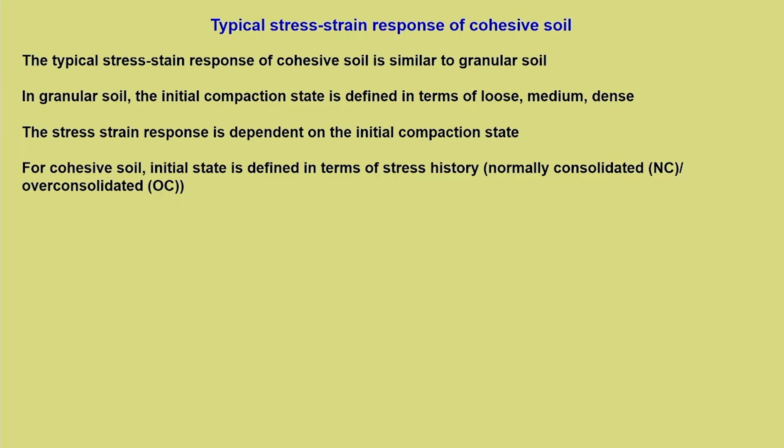The typical stress strain response of cohesive soil is similar to granular soil, which means the end response remains same. In granular soil, the initial compaction state is defined in terms of loose, medium and dense. The stress strain response is dependent on the initial compaction state. For cohesive soil, the initial state is defined in terms of stress history, normally consolidated or over consolidated. Now possibly you will appreciate why we discussed the volume change characteristics of the soil. It is basically for this; the stress history dictates the kind of stress strain response of cohesive soil.

The stress strain response of NC is similar to loose state. The stress strain response of OC is similar to dense state. The stress strain response is in terms of deviator stress and axial strain, because we are referring basically to triaxial tests. In general, shear strength of cohesive soil is tau f = c' + sigma'f tan phi'. This is a general expression. Now when will c' be there, and when is it not there? That is a typical thing which we need to see.

Now let us not go by the judgment that a cohesive soil always has cohesion. This is not correct. As we progress in this particular module, we will see that it is not so. Under what circumstance we have cohesion, we will see later, but in general we can consider the Coulomb's model tau = c' + sigma' tan phi', and this is for effective stress, a long term condition.

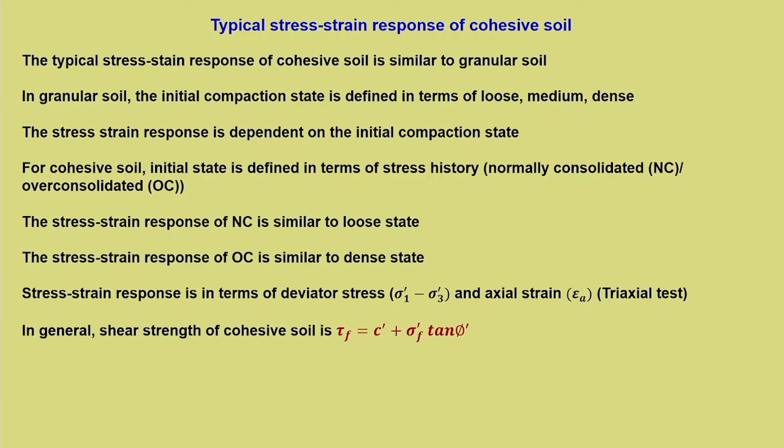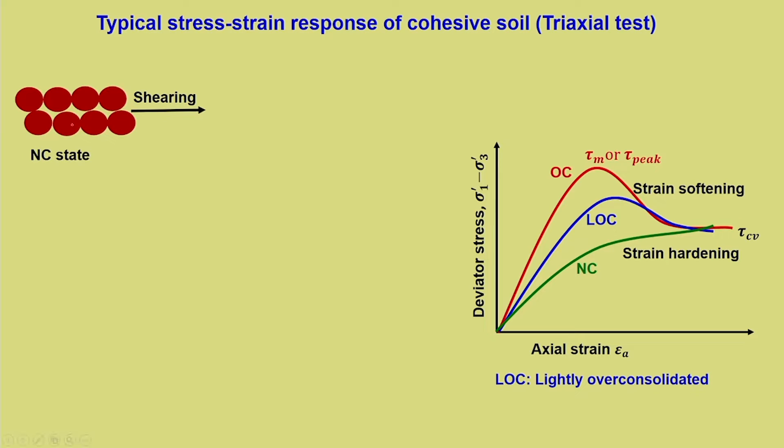So typical stress strain response of cohesive soil. More or less things remain same; the y axis and x axis have changed, but the response remains similar. For an NC soil, when it is sheared, we can see that it is a loose state. Why? Because it has not been stressed too much in the past. So when the NC state of cohesive soil is sheared, particles move horizontally and downwards because it is in a loose state, and undergo compression during shearing. So it is getting packed more, because in the spaces it gets readjusted. Significant plastic rearrangement of particles happens, and that results in a response similar to that of loose state.

Now for OC state, when it is sheared, shearing is restrained by interlocking. Why? Because the present stress which we are applying, the soil has already experienced in the past. So it is stiff enough to respond to that particular stress. Since the packing is done in a stiff manner, the particles have to move upwards. This causes expansion or dilation, the way we explained it for dense state of the soil. Loose pockets form when it dilates, and that is known as shear bands. Because of this there is a dilating response and strain softening happens, mainly because of the upward movement of the particles which causes dilation.

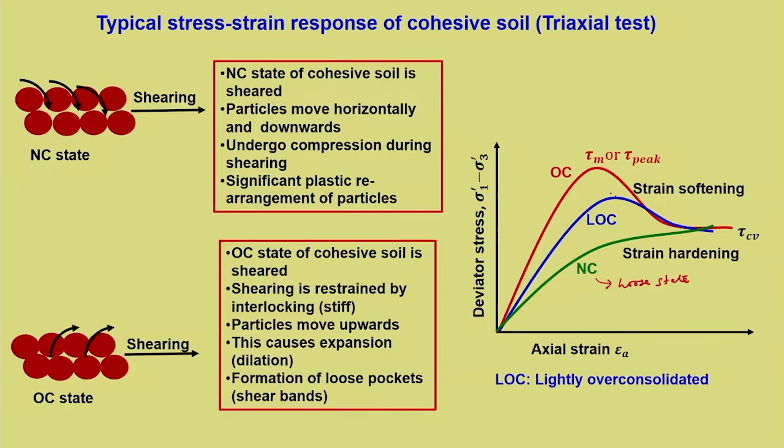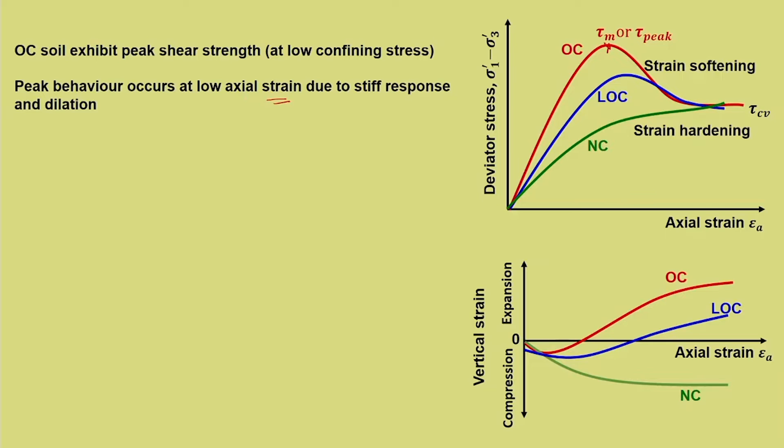Now there is an intermediate stress state, which is called lightly over consolidated or LOC. Whether an LOC will exhibit a peak behavior or not depends upon the amount of over consolidation it has been subjected to. So it need not always exhibit peak. OC soil exhibits peak shear strength at low confining stress, when dilation is possible. And peak behavior essentially occurs at low axial strain, so it shows a stiff response at low axial strain because of dilation. That is what has been shown by this response.

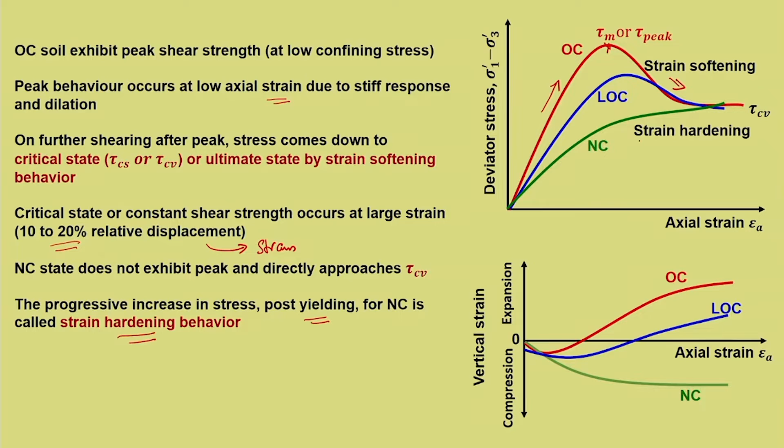On further shearing after reaching peak, the stress comes down to critical state, the same manner we discussed for dense state of granular soil. So it reaches ultimate state by strain softening behavior, and critical state essentially occurs at 10 to 20%. Here it is not relative displacement, it is strain. Normally consolidated state does not exhibit peak and directly approaches tau cv, the critical shear strength. There is a progressive increase in stress post yielding; somewhere it yields, and it meets tau cv by strain hardening behavior.

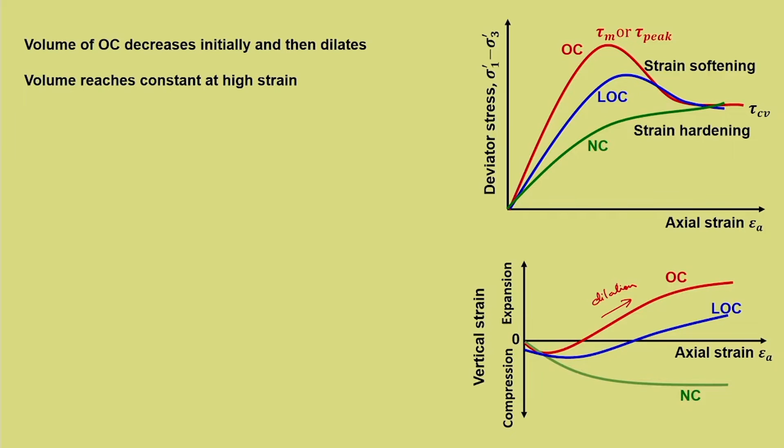Now, we have discussed the typical stress strain response. Next we will see what happens to the drained volumetric change response. The volume of OC, that is over consolidated, decreases and then it dilates. So this dilation happens, with increase in strain. The volume reaches constant at high strain. At a high strain condition, the concept of critical void ratio comes into picture, so the volume essentially becomes the same.

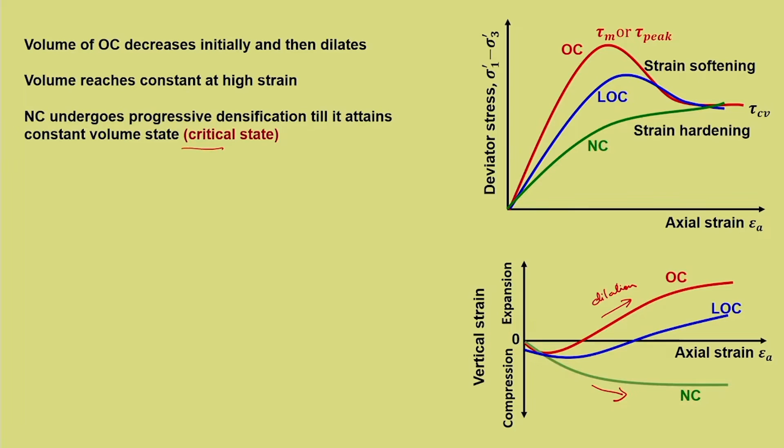Normally consolidated soil undergoes progressive densification, as you can see here, till it attains constant volume state, which is the critical state. Now, to know the initial state of cohesive soil at same stress, I am going to introduce another scenario where the cohesive soil is at the same stress, but at different void ratios and OCR.

So, if you see an NCL behavior and there is unloading, let us say at 3 different points, and on this unloading, let us drop a vertical line. So, here sigma dash is same, but the void ratios are different, eA, eB, eC and eD. Now, if you see its over consolidation ratio, that is also different.

For this point B, it is not that over consolidated, we can call it as lightly over consolidated. It is relatively less stiff than other over consolidation. C, for this much it got unloaded, so it is a heavily over consolidated sample. D is more heavily over consolidated than point C. Here it is same normal stress, but different void ratios.

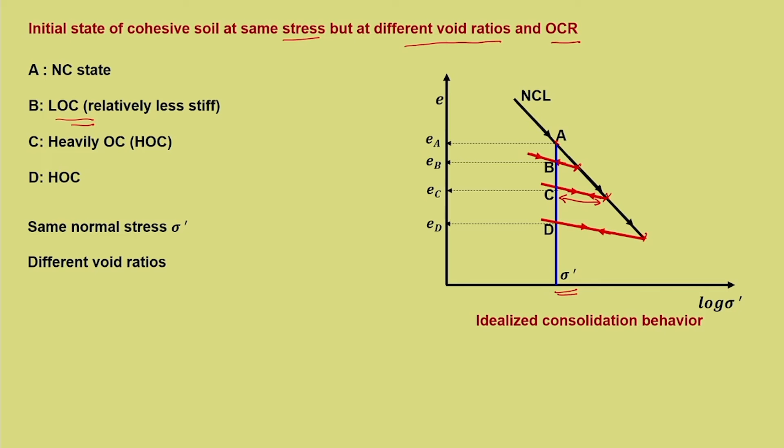Now, because of this, even though it is at the same stress condition, the stress strain response will be totally different for all these 4 points. A, anyway it is normally consolidated, but for B, C and D it will be totally different. How it is different? As it has been marked here. Now, A is a normally consolidated plot, so we know it strain hardens and reaches tau CV.

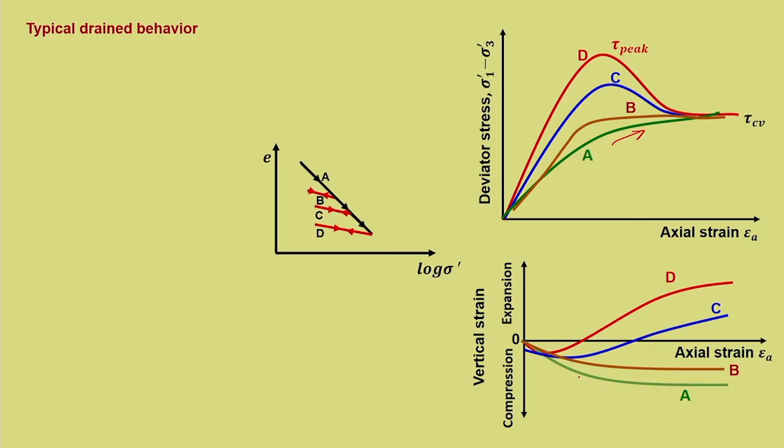B is lightly over consolidated, as I told in the beginning, it may or may not exhibit peak depending upon its over consolidation ratio. Let us say B is not that over consolidated, so it is also more or less similar to A, but slightly different from that. So, it undergoes densification only, there is no dilation. But for C, there is a kind of dilation that happens, and D, the dilation is more, which is heavily over consolidated. In the same manner, at large strain, all the samples have same shear strength. So, this is what it means.

Now, even though the conditions are different, where is the actual difference that is coming? That is along this peak response. At peak response the shear stresses are different, but all of them come out to be the same value later, that is at tau CV. It will also achieve the same void ratio at tau CV, that is the concept of critical void ratio.

At a critical state, it ultimately reaches a critical void ratio, but towards the peak response the void ratio will be different. At this particular point, if you see the void ratio, then it will be different for all these 4, but in the end when it reaches that critical state, the void ratio also becomes comparable. At peak state, shear stress is different, I have already discussed that. Void ratio will be different.

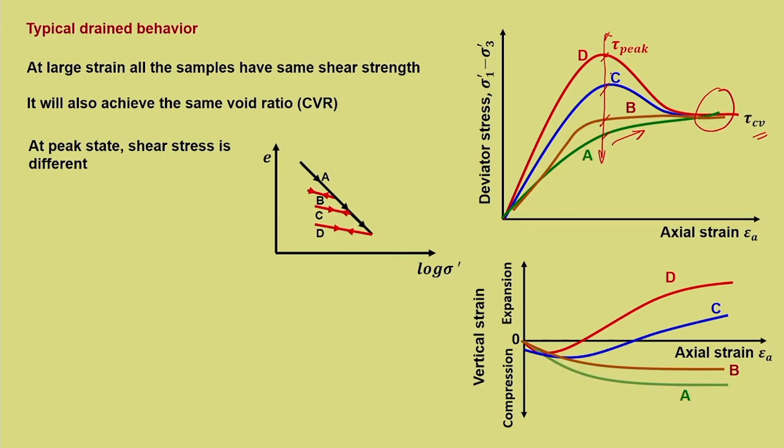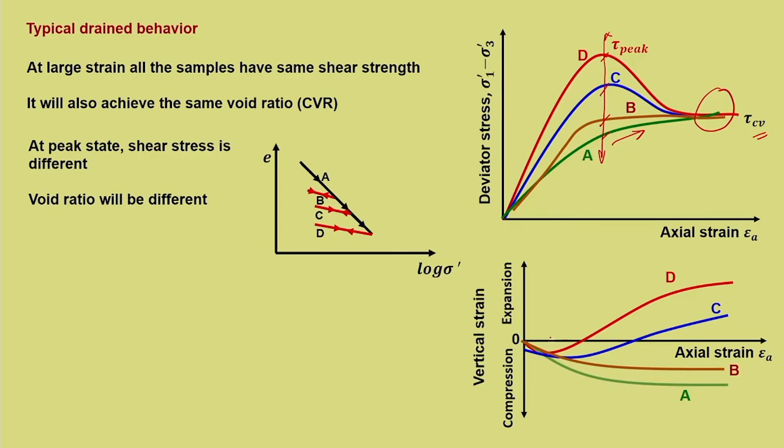So, in the volumetric response also, we can see that A and B undergo progressive densification and C and D exhibit initial compression and further dilation. So, Coulomb's failure line, how these A, B, C, D translate to Coulomb's failure line. This is the critical state line phi dash cs, and depending upon the amount of dilation, there will be a kind of peak angle which gets added. There is a dilation angle which gets added to phi dash critical state, and that results in phi dash peak.

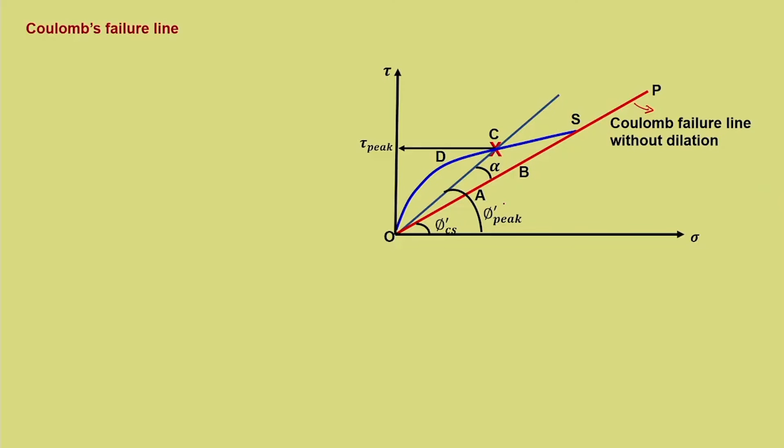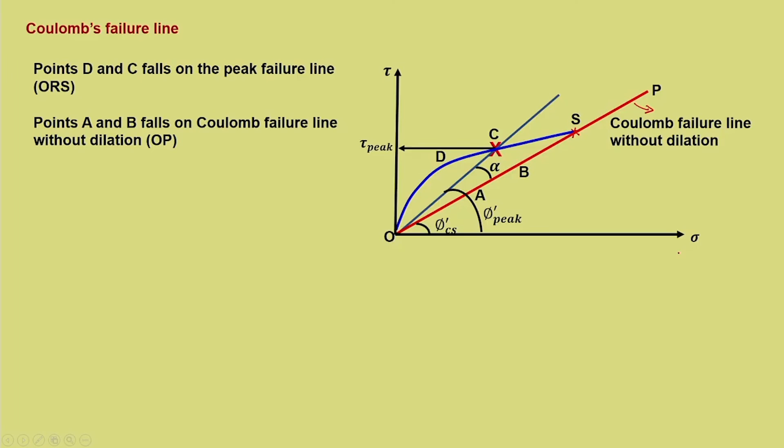So, we can see that C and D fall on the peak failure line. So, it also depends on the kind of confinement it has. So, we really do not know where actually C and D will fall, but C and D will exhibit peak behavior with dilation angle, whereas points A and B fall on the critical state line. Why? There is no dilation, so this stress remains same. And similar to dense state which we discussed before, there will be a kind of dilation suppression at a higher normal stress or higher confining stress. So, that is all about the shear stress response of the cohesive soil during shear strength tests.

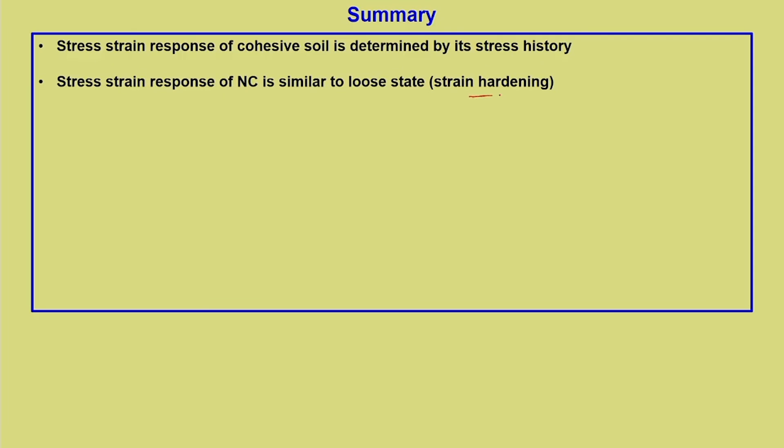So, let us summarize the important points. The stress strain response of cohesive soil is determined by its stress history. That is a very important point which we need to stress. When we discuss granular soil, we talk in terms of loose and dense. When we talk in terms of cohesive soil, we understand this in terms of stress history, rather NC or OC. Stress strain response of NC is similar to loose state, which is strain hardening. Stress strain response of OC is similar to dense state, which is strain softening.

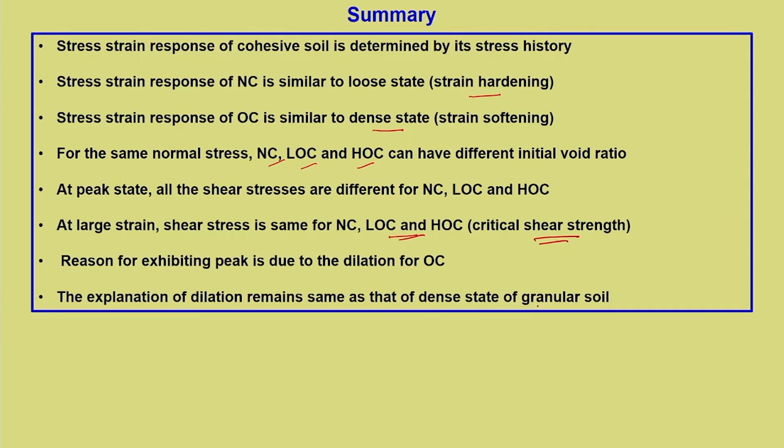For the same normal stress, NC, LOC and HOC can have different initial void ratio. At peak state, all the shear stresses are different for NC, LOC and HOC, but at large strain, shear stress is same for these conditions, and that is referred to as critical shear strength. Reason for exhibiting peak is due to the dilation in the case of OC. The explanation of dilation remains same as that of dense state of granular soil. So, that is all about shear strength of cohesive soil.

We have just begun. Now, we will discuss some of the factors in detail. For example, in the next lecture, we will continue with the discussion on importance of pore water pressure and its prediction, what we call pore water pressure parameters. And then we will continue with the interpretation of triaxial test results. So, we need a background for those interpretations, and that is what we have achieved till now.